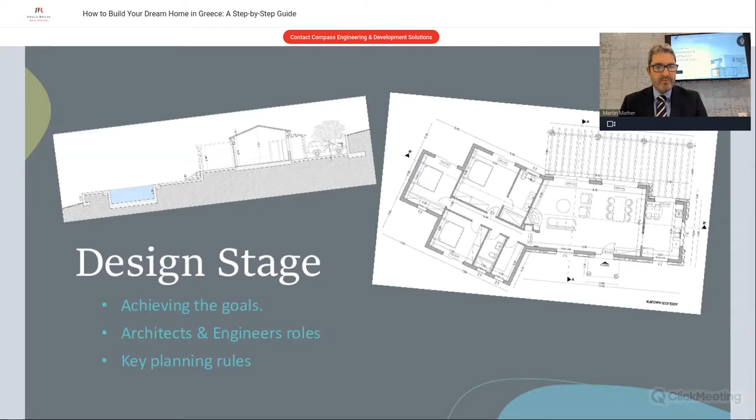Let's get into some of the detail now. Firstly, to deal with the design stage, and as I said, what I want to focus on here is really achieving your goals, the roles of the architect and engineer, and some of the key planning rules.

So it's important that during the design stage, this whole design process is controlled, or there is a risk that the final design is actually not in line with your requirements or within any of your constraints.

To assist us in achieving those goals, at Compass we generally follow the long-established Royal Institute of British Architects, or RIBA, plan of work. This process is recommended by us because it has defined stages and deliverables for each of those stages, and at completion of those stages there's an approval process by the client.

In summary, these stages start with stage 0, the strategic definition. This is about determining the best way to achieve your requirements. Here we'll be discussing your goals, your budget and timeline, and we develop an overall plan that outlines the steps required to get us to the completion of your project.

Once we've got the strategic plan in place, we'll then move on to the preparation and briefing stage. During this part, we'll be developing a detailed brief. This will outline the scope of the project, the site conditions, and any other factors that might impact the design.

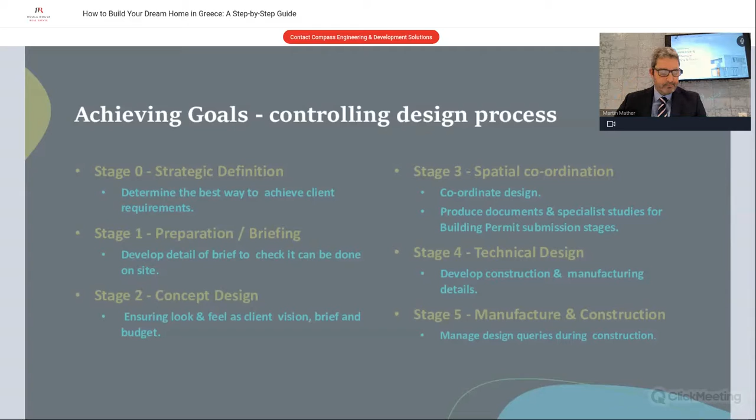In addition to controlling the design process, the other key activity essential in the design stage to achieve your goals is a buildability review. This means reviewing the design to identify any areas that may introduce unnecessary risk or cost. From that review, we can then propose improvements for cost and or time benefits. Our construction team carries this out, as they're an integral part of the project team from the very start - they don't just turn up at the end of the design process.

Cost planning: in this design stage, you should expect to receive a preliminary cost estimate for the construction based upon the design as it develops through the design stages. We look to provide this as soon as possible and develop it as the design develops, because this gives you transparency on what is being designed and the costs associated with some of the decisions you may make around the design. It's important to keep it connected to your overall budget, so any changes potentially being explored in that design development stage, a cost effect associated with introducing something else can easily be included or excluded based upon the estimate of that element.

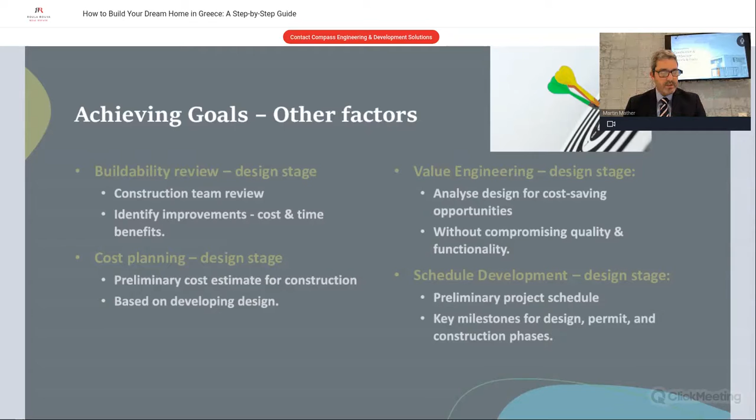Finally, around schedule development. So this is looking really to produce the preliminary project schedule with the milestones that are required, not only in design and permit, but also for the different phases of the construction process.

So moving on now to the architects and engineers' roles. It's important to recognize that these guys have some really key parts to play in your design, not just to create the optimum design to your brief, but also they have to ensure it is compliant with the planning regulations. And they are also required to formally sign and approve all the documentation that is needed in the process with their official stamps.

And all the information associated with the project is then compiled by them into an electronic project folder, so the relevant documents can be issued to the Technical Chamber of Greece, the TEE, can be issued to EFKA, the Social Security body, can be issued to the Architectural Committee for their review of the design, and also to the Planning Office for the formal permit processes.

Now, this set of drawings signed by the corresponding experts, the architect, the mechanical, electrical engineer, the structural engineer, all of that is submitted under their responsibility. As I said, they are approving the documents. Therefore, the building permit includes these experts as legal supervisors for the project.

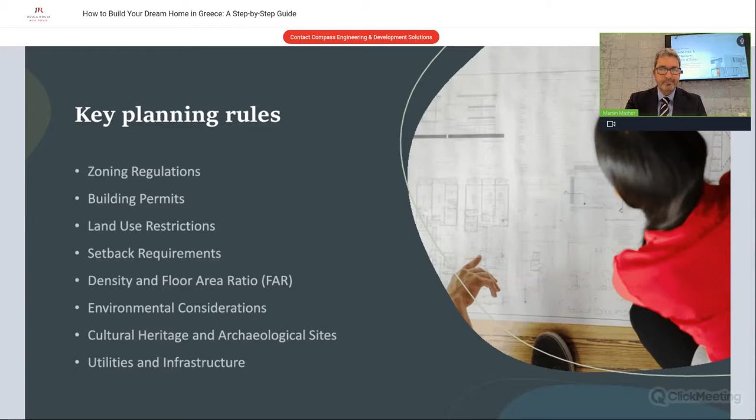Okay, just want to focus now on two key aspects. The first one is if you have a plot outside of the village zone. First of all, you need a plot of at least 4,000 square meters. When looking at building coverage, the regulation refers to a percentage of the plot that can be covered by the footprint of the buildings. On these plots, the building coverage or footprint is limited to 10% of the total plot area.

Setbacks, as I said, refer to the required minimum distances between the building structure and boundaries, but they also cover roads and other structures, established to ensure proper spacing. Setbacks for boundaries are generally 15 meters, although there are other allowances depending upon the particular width of your building design. 10 meters to riverbanks, 10 meters to forest land, to help preserve the natural environment, including vegetation, wildlife habitats, etc. For roads, these are calculated based upon the type of road the property faces and are measured from the center of the road.

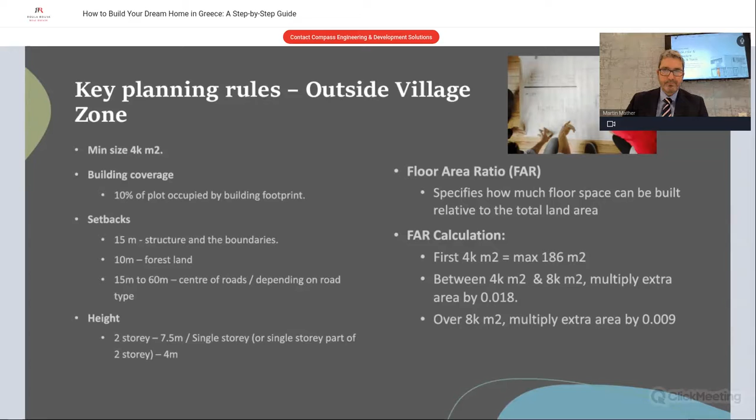If you're inside a village zone, there is a residential building coverage limit for these plots, and to calculate this, you simply multiply the plot area by the building coverage limit. The limit of 60% applies to the total area occupied by all the buildings, and this 60% can increase to 70% for smaller plots, so a minimum, I think, of 120 square meters can be built. That gives you that flex on some of those smaller plots.

Counted in the calculation is the outline of all the enclosed areas of the new building, semi-outdoor spaces such as terraces, and any existing buildings that might already be on the plot. Excluded in the calculation are balconies, basements within the footprint of the above ground building, pools, and if you create a design with vertical openings from ground floor to roof level that don't have a cover, like an atrium, that also is excluded from the calculation.

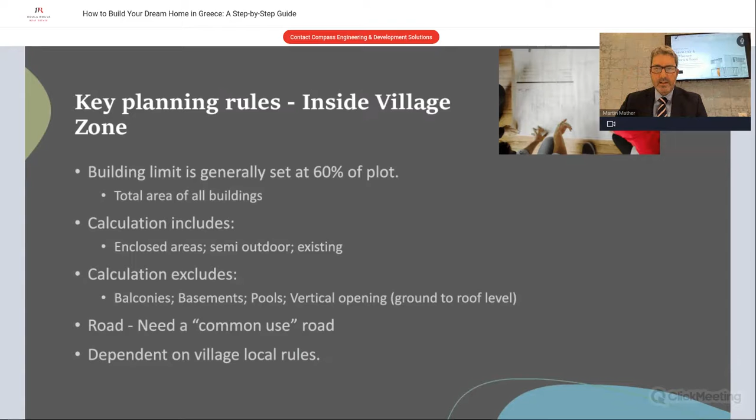The plot does need to be on a road that is in common use. Common use can give you a range of the size of that road, but it can also vary depending on some of the local village rules which might affect these. Again, always important to check the specifics of the plot.

So now to talk a little bit more about the actual building permit, I'm going to go through a summary of the process, the documentation, the permit types, and the validity.

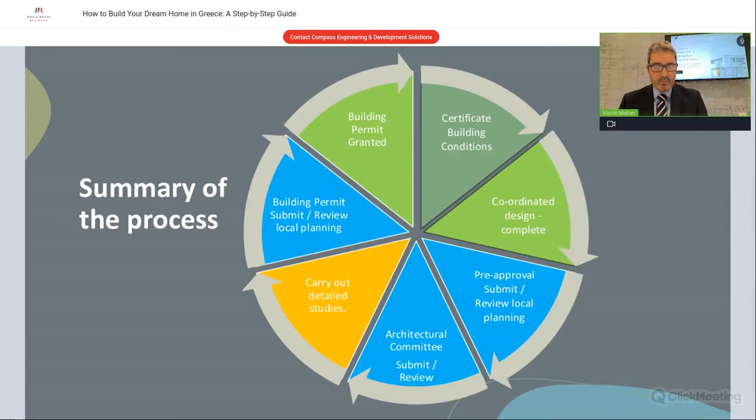Hopefully this graphic makes it easy to follow, but as I mentioned in the key planning rules earlier, if you're planning to construct, you're likely to need a permit from the local authorities. There are 3 types of permit, and I'll explain those a little bit later. But if we start with the certificate of building conditions, this is advised to get for all permit types, and it can be applied for from the very start.

It only needs a topograph, an ownership contract, and a technical description of the plot that would have been provided during the purchase process. It's normally issued within 2 weeks, and again, it's categorized in line with the building permit types. Once we have a coordinated design complete, in accordance with the controlled design process I discussed earlier, this design will be produced in the formats required for the planning authorities, ready for submission.

They're then prepared and submitted for pre-approval. Pre-approval is needed when we are in Category 1 and Category 2 type permits, and these are the higher controlled areas. These documents for submission include topograph, ownership contract, technical description, architectural studies, 3Ds, and elevations. At the same time, the local architectural committee will be asked to review the design, and when submitting to the architectural committee, only the architectural studies, 3Ds, and elevations are required.

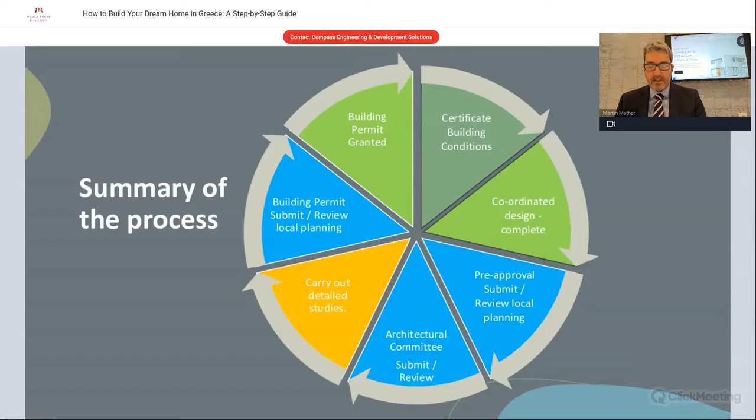Once these stages are complete, we start the detailed engineering studies, so as not to waste time on engineering for a design that may not actually be approved. Once the engineering studies are complete, we produce the complete set of design documentation to be submitted to the local planning office for full building permit approval. I'll let you know the details of that documentation next. But it's important to note that in addition to the documentation, there's a requirement to pay the government taxes in advance, for the license and for the social security. The planning office then reviews the documents and proceeds to issue the full building permit.

I'm just going to take a short drink, bear with me.

As I mentioned earlier in the building permit process, a complete set of design documentation is required, and this includes the architectural study, that includes the detailed drawings, the specifications, building layout, exterior design, interior layout, external finishes, and any other particular architectural features.

The topographic is the drawing which shows the main physical features of the ground, such as buildings, fences, roads, etc., as well as the changes in elevation across the plot, so the contours of the plot. The structural study outlines the building's foundation, load-bearing walls, beams, columns, and any other structural elements that support the building. The electrical and mechanical study covers all of the building's electrical and mechanical systems, including lighting, heating, ventilating, air conditioning, plumbing, and any other utilities.

The thermal study assesses the insulation properties of the building and ensures that they meet the local energy standards. When it comes to water supply and drainage, this study describes the water supply and wastewater disposal systems, including any piping, fixtures, and drainage systems. The fire study describes the building's fire prevention measures, including any alarms, sprinkler systems, or any other safety features.

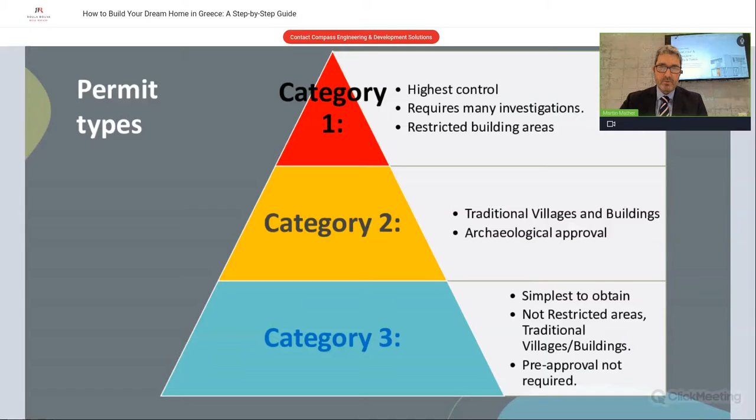Once you've got your permit, it'll be valid for 4 years. It can be extended for another 4 years for an extra small fee if you don't start the construction, as long as the conditions of the building on that plot have not changed. If you do start the work and actually complete the superstructure, the facade or the outside of the building, and the roof, then your permit will actually remain valid forever, in perpetuity.

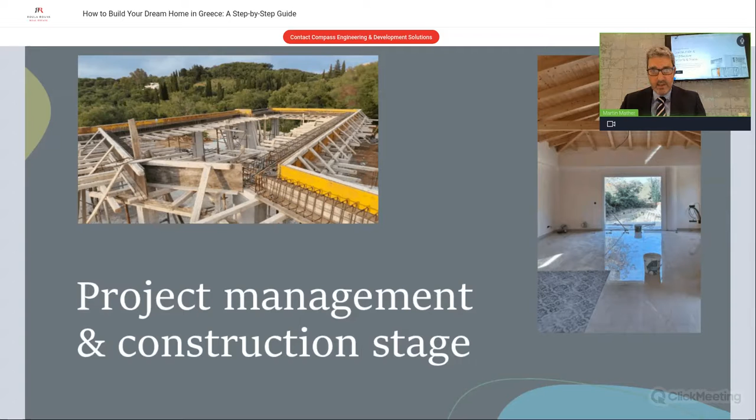So we've discussed the design stage, we've discussed the building permit. What's next, of course, is the project management and construction stage.

So, first of all, what is project management? This term covers all of the activities of the team as they oversee every aspect of your project from start to finish. They're making sure that everything is delivered smoothly and efficiently, so you don't need to worry about anything. In summary, this includes everything from the initial planning and design through the construction and commissioning stages until the final building is handed over to you completely finished.

Some of the key tasks to note are, firstly, the selection and appointment of the construction technicians and the ongoing daily management of every aspect of their work on site.

Quality control: having taken the time to design your property, you need to ensure that a quality control process is applied during the construction to make sure it actually meets the requirements. This includes a variety of techniques such as inspections, testing and documentation, measuring everything against the quality that we expect to receive.

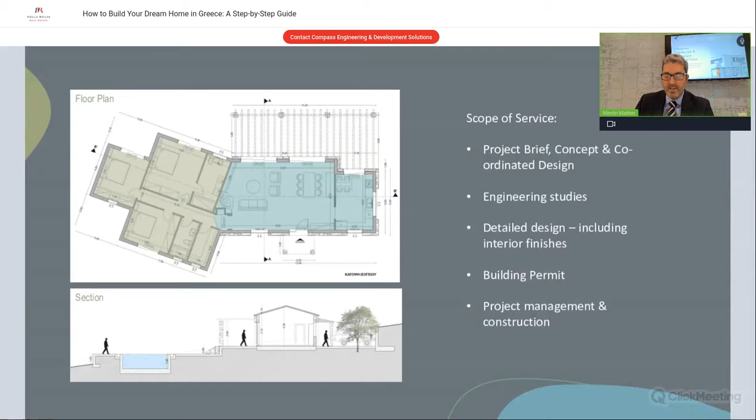The final design resulted in a 150 square meter home with one master bedroom, an ensuite bathroom, two further bedrooms, a family bathroom, and a large open plan living and dining area, as well as a separate kitchen. Outside, the design included pergolas and an open kitchen area, a pool, and tiled spaces that match the interior to create that seamless flow from inside to out.

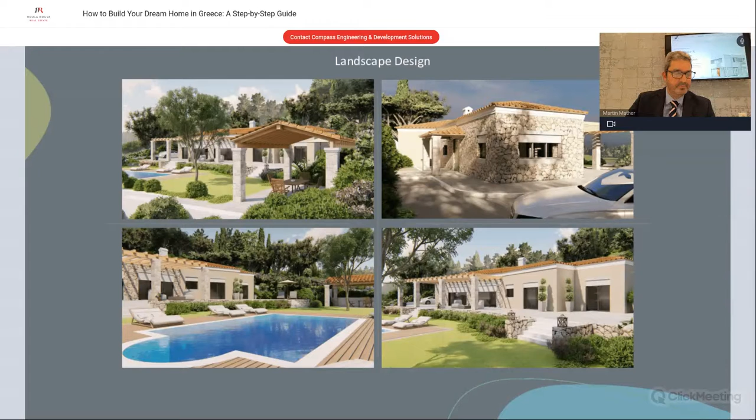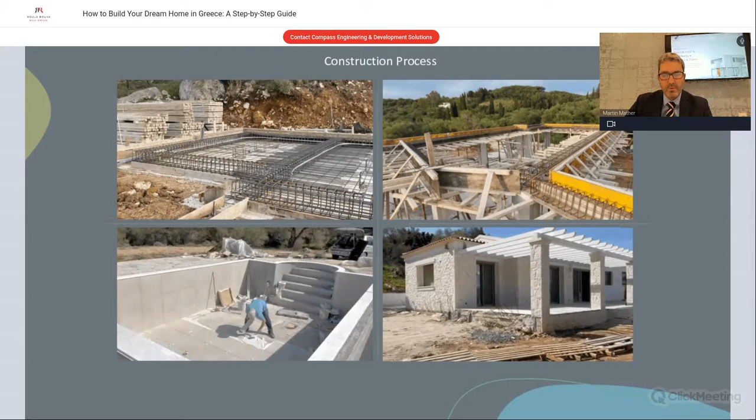This is an example of a large luxury project that is nearing completion. Again, we designed this property from scratch. This time we used some external support partners to support the team during the design due to some of the specifics, and also because of the very high-end internal finishes.

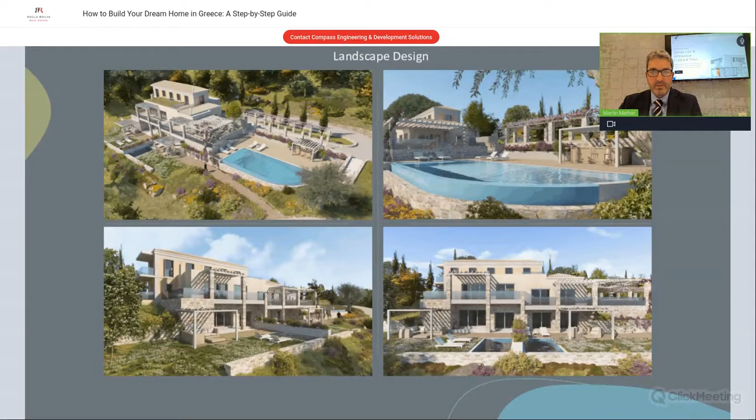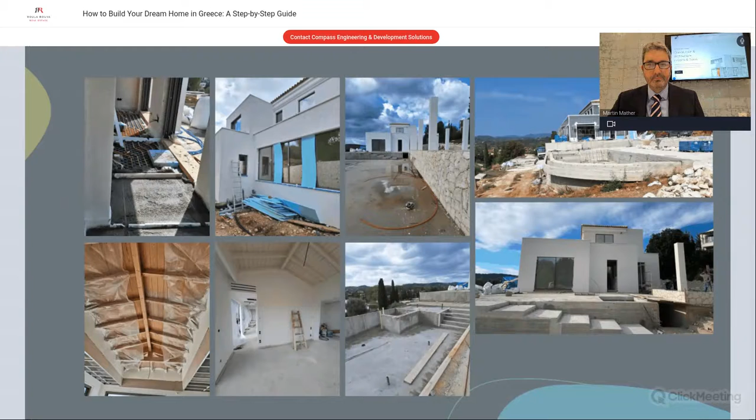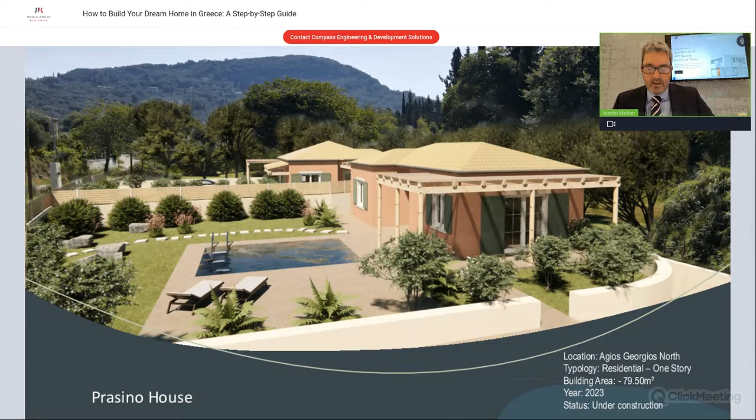This is an example now of a more modest property. This home was designed on a relatively small plot. We designed this as a single-story detached house with pergola and private pool. The aim of this design was to blend it smoothly with the surrounding nature, as it's located in a quiet location, next to a small river and shade from the trees, etc.

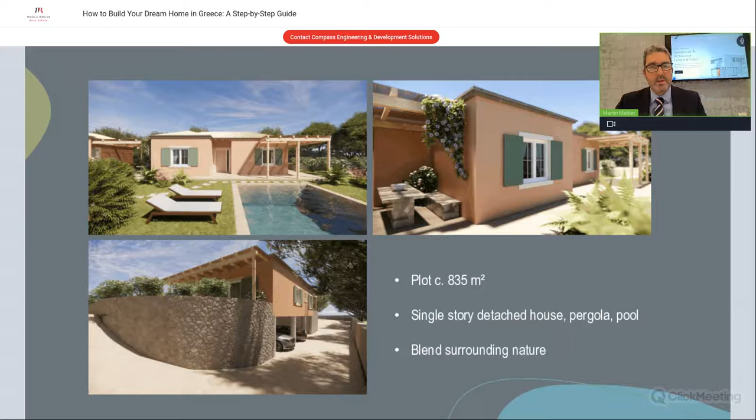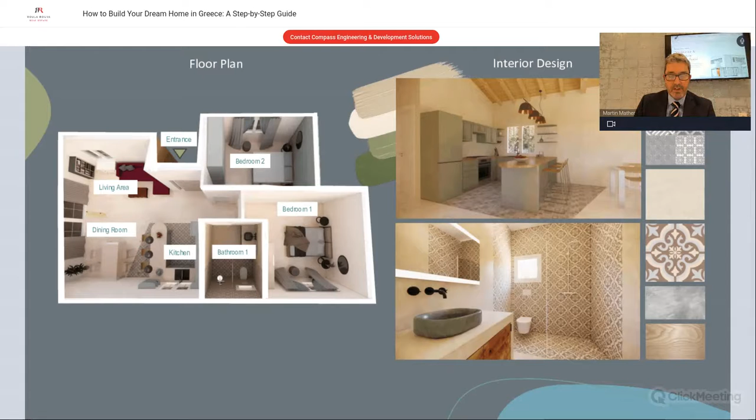In this particular plot, we managed to achieve a floor area of about 80 square meters, which delivered 2 bedrooms, a bathroom, an open plan living, kitchen, dining area, as well as a basement of, I think, an additional 67 square meters. Again, you can see here the base floor plan and some of the 3D renders of the interior.

And some more construction photos to give you some more examples.

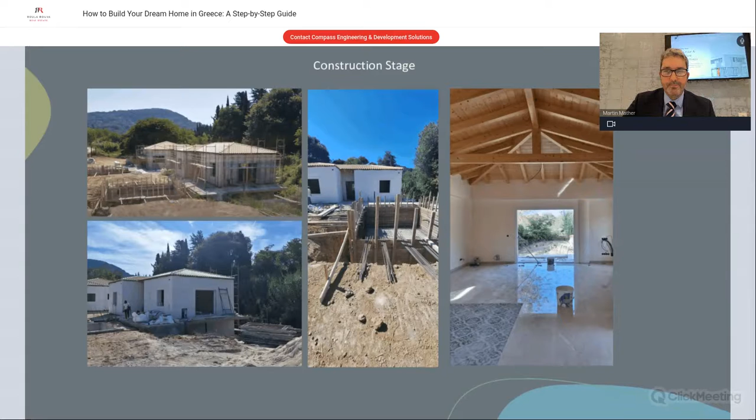We have here a project that's due to start construction this year that we again have designed from the start, and we've taken it through the full building permit process. This shows the development of the floor plan and the use of axonometric in the 3D design process.

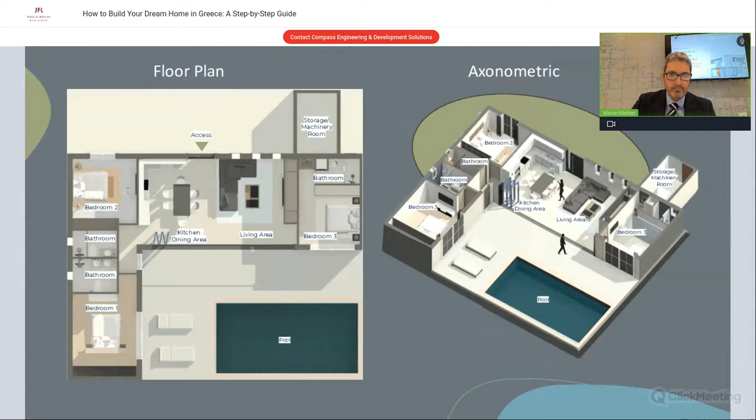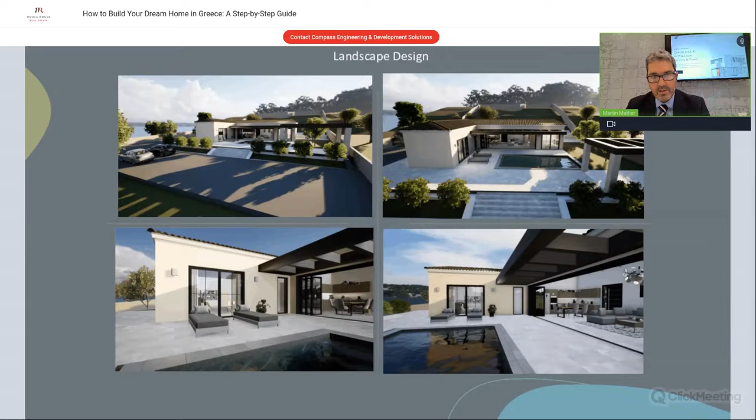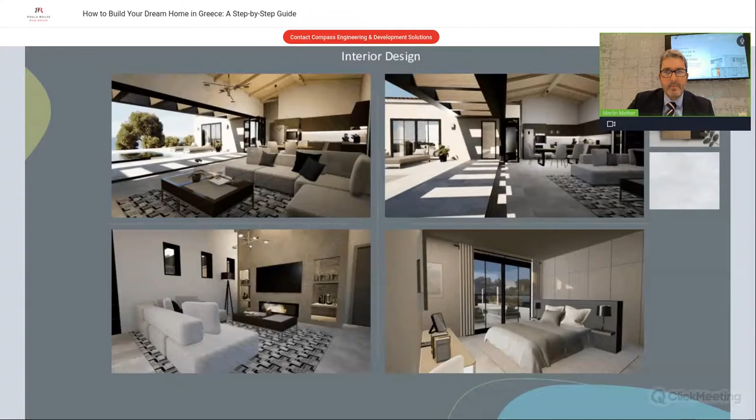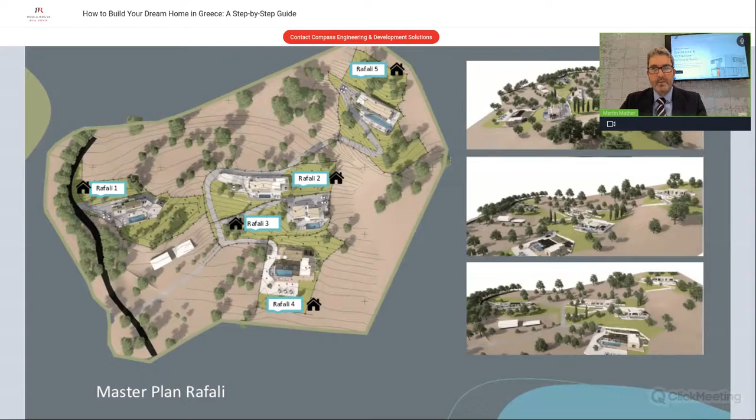This is an example of how we can deliver a master plan for multiple houses, not only a single home. This is one of the developments off that master plan, and this image shows its external view of the house and how it fits into the landscape.

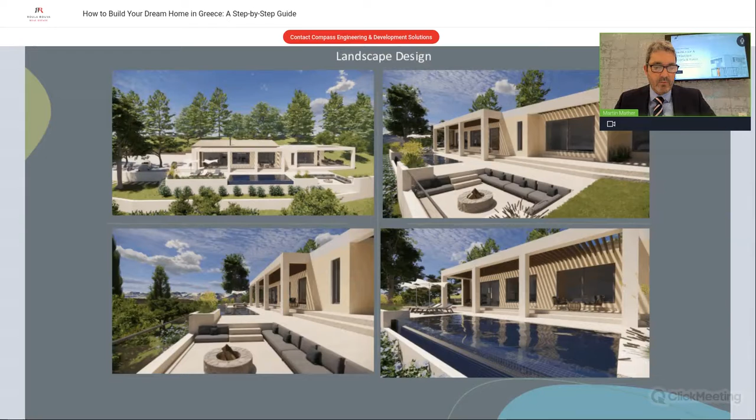Finally, for this webinar, just being conscious of time, this is an example of designing and constructing multiple buildings on one plot. This was designed with the owner's key drivers of creating an elegant and pleasant environment based on the traditional Paxos farmhouse. There was a need to incorporate not only the traditional techniques, but also new design and some fine detailing.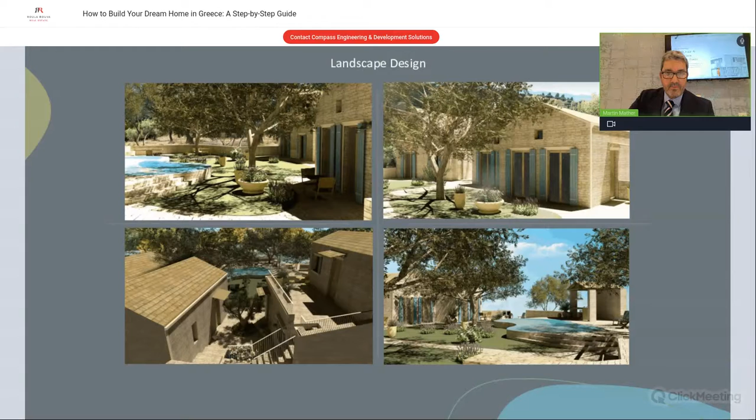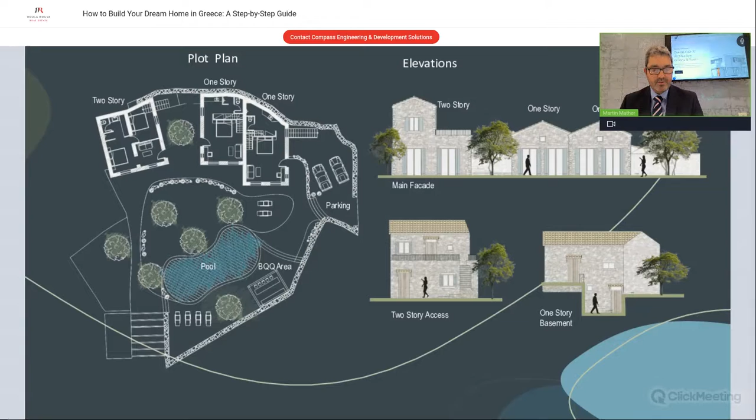And here you can see the design development showing the plot plan and elevations of each plot, and again, some of the construction stage photos.

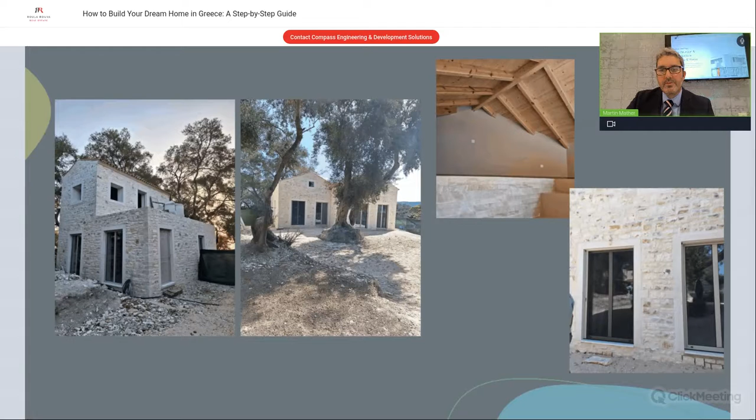Okay, good. So I think time-wise, I hope that in that time it's enabled you to get a good understanding of some of the key elements. It's obviously a challenge to cover all of the detail, but I hope I've given enough information and the balance was right.